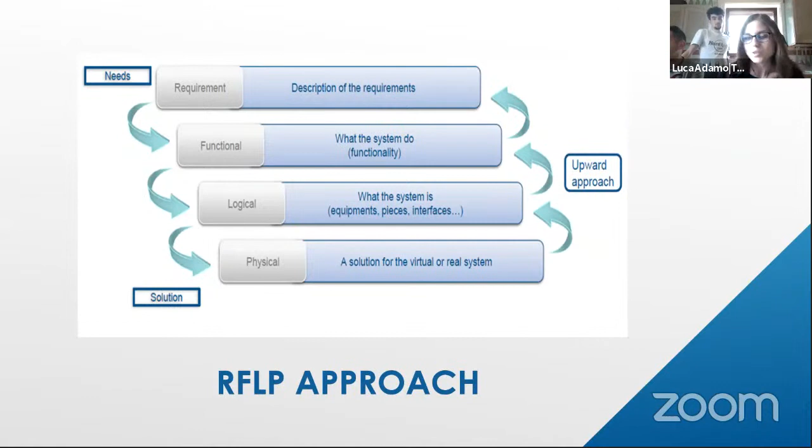We used and adopted an RFLP approach. So starting from customer need and functional requirement, we arrived at a physical prototype, or maybe in this case, a virtual prototype. We listed the customer needs and underlined the keywords to understand better our task, in order to satisfy what our customer needs.

The first phase was brainstorming, and we used the flower technique that we learned during a creativity session on the first day of this event. In this way, we could understand better our task, and we used more and more sketches in order to evaluate our idea.

The preliminary analysis was the comparison among different concepts and shapes. Among different shapes and structures, we decided on the simple parallelepiped compared to an inflatable shelter, sphere, or extendable cube, because it is at the same time able to withstand large loads - not only nuclear, but also thermal and mechanical - and it is particularly feasible and cost effective.

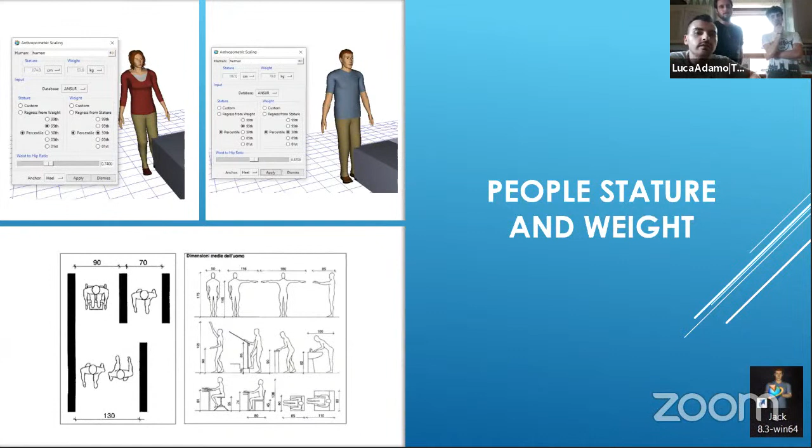The first thing that we did to understand the measures of our prototype was to understand the standard dimensions of people. In particular, we looked for an average man and an average woman, and we used these dimensions to generate our first prototype.

We used the software Jack - this is why Jack in the Box - to understand if these dimensions were able to have 3 people inside the capsule during these 3 days. We found the perfect dimensions, so we arrived at our final prototype, where you can see the dimensions written in the lower part of the slide.

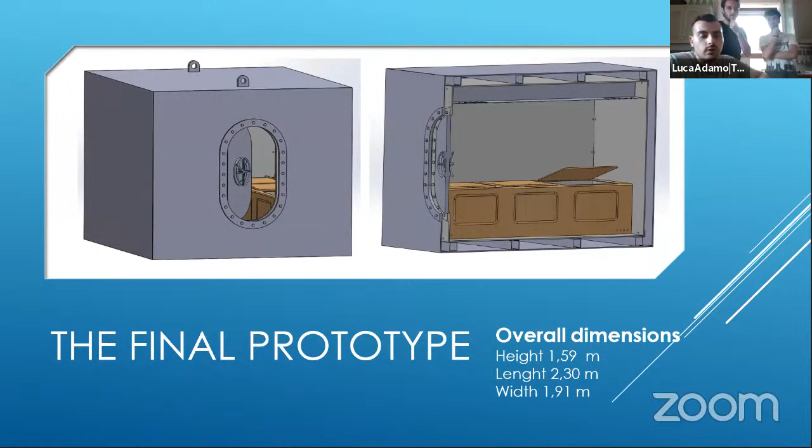Moving on, we looked for something that was easy to transport and easy to assemble. We wanted our prototype to be constructed using only simple parts that had to be connected with bolts and nuts. So it is feasible, and also using simple parts, it is cost effective - all the parts have a low price.

Then we can move to the living cell, the part where people have to stay during these days. The living cell is made of fiberglass to make it lightweight, wood for the places where people can sit, and aluminum for the ventilation system.

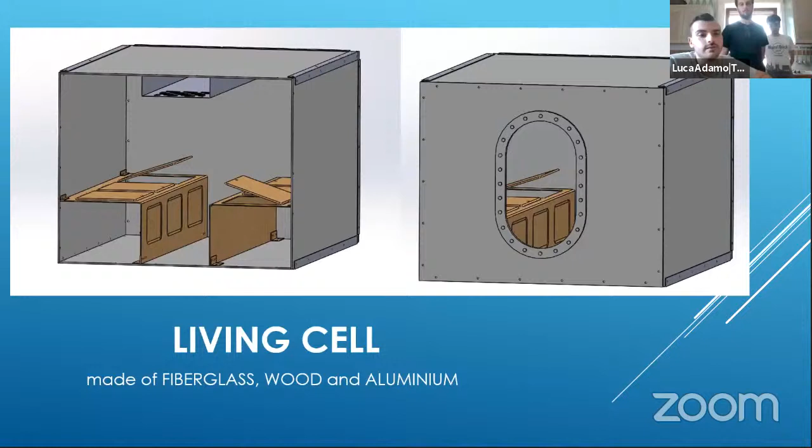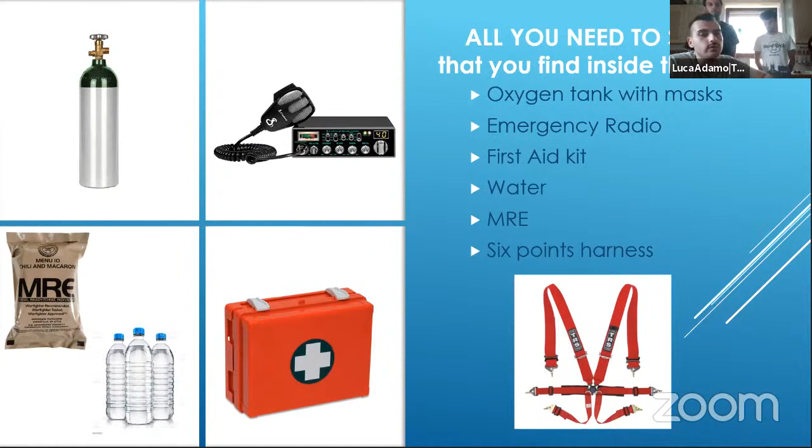We designed 2 lateral seats with storage compartments to optimize the space. These compartments had to contain everything useful to survive - for example, an oxygen tank with masks, an emergency radio, a first aid kit, water, MREs, and we also thought of introducing a 6-point harness to prevent injuries to the people inside the box.

One of the most important parts of the living cell is the ventilation system. All the components useful for a ventilation system are in an aluminum box positioned on top of the unit. Inside the box, we have the standard components of a ventilation system, but with a main component that makes a normal ventilation system able to work also in an absolutely closed cell. The main component is the filter, made of potassium dioxide, that is able to convert carbon dioxide into oxygen.

In order to protect the cell, which we have seen is made of easily breakable materials, we add an outer shell. The outer shell is made of structural steel and is reinforced by rectangular beams. The fact that it is made of 2 different structures makes us able to have a space between the inside and the outside of the cell.

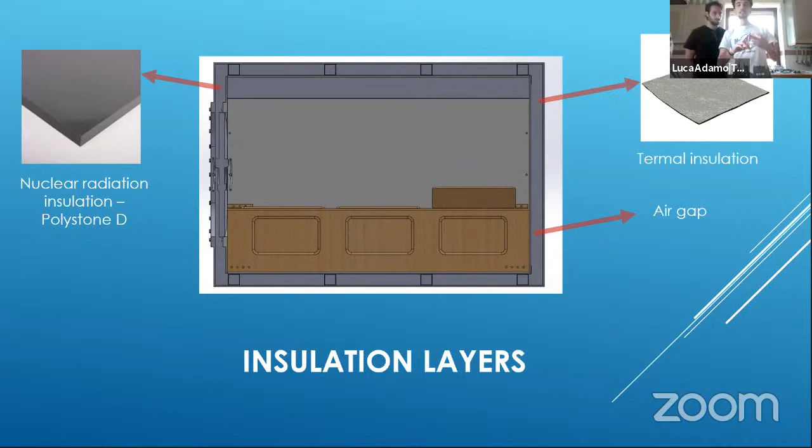We use this space with air, which we know is a very good insulator. But we also add two layers: a thermal insulation made of technofiber, useful for thermal insulation, and a layer made of polystone D that is able to protect the cell from nuclear radiation. We also add two supports to make a helicopter or crane able to rescue the cell in a difficult situation.

Then we analyzed our structure using FEM analysis. To carry out our analysis, we used a simplified model of the structure made of only 1/4 of the structure, for computational time and simplicity of the analysis.

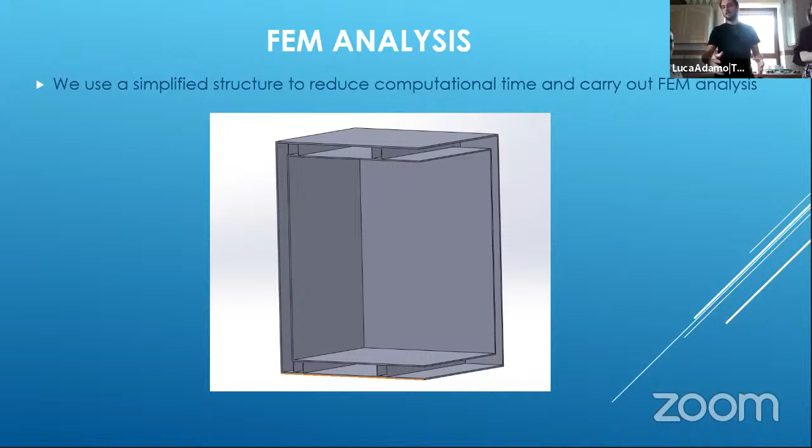The first thing that we analyzed was what would happen after an earthquake when all the debris are on top of our structure. So we put a vertical load on the roof, and we verified that the stress in the structure was very low.

We tried to apply bigger loads, and then we discovered that our structure was robust enough.

Then we tested what would happen if our structure was 5 meters deep underwater after a tsunami, applying pressure on all the other walls. We discovered that in this condition we were safe, because steel has a yielding tension of 300 megapascals, and in our case we have only 261.

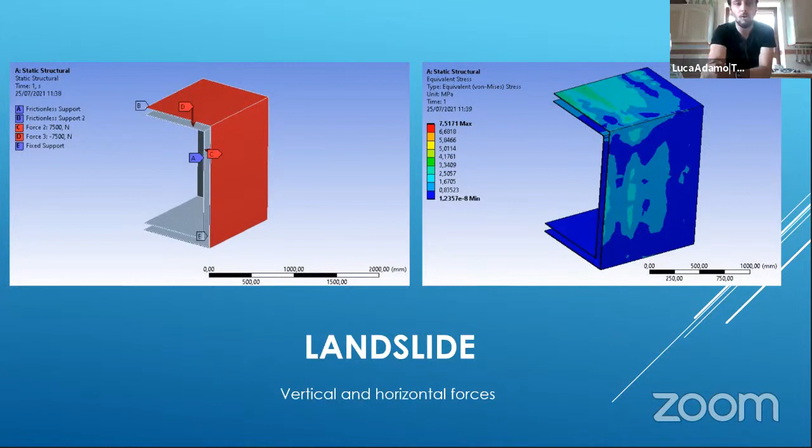Then we tested a landslide, applying forces on the vertical and horizontal walls, and we saw once more that we had only 7 megapascals on the walls.

So thank you for your attention. That was our project. Good luck to everyone that follows us. If you have any questions, we are here to answer you.

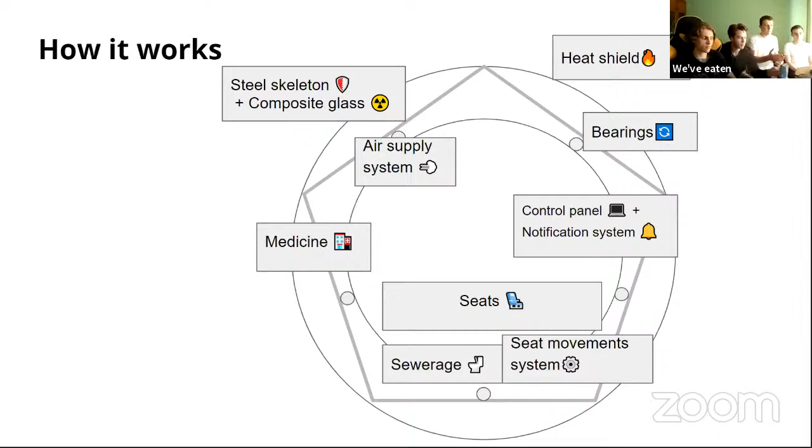Okay, let's talk about radiation. As we know, the best radiation protection from gamma rays is lead, a heavy layer of lead. But I found that the composite glass, which consists mostly of barium oxide, can protect better than anything, and it protects from gamma rays very well.

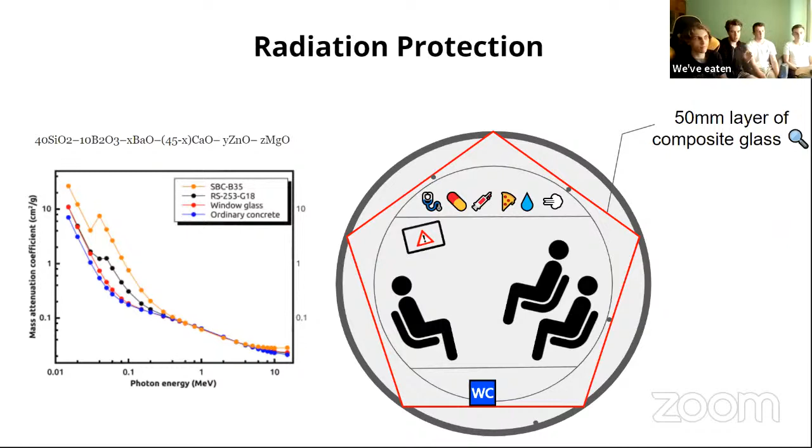Okay nice, what about fire protection? We found out that the best thing to protect from high heat and high temperatures is to cover the capsule with a heat shield, like the ones space shuttles use, and it works pretty well.

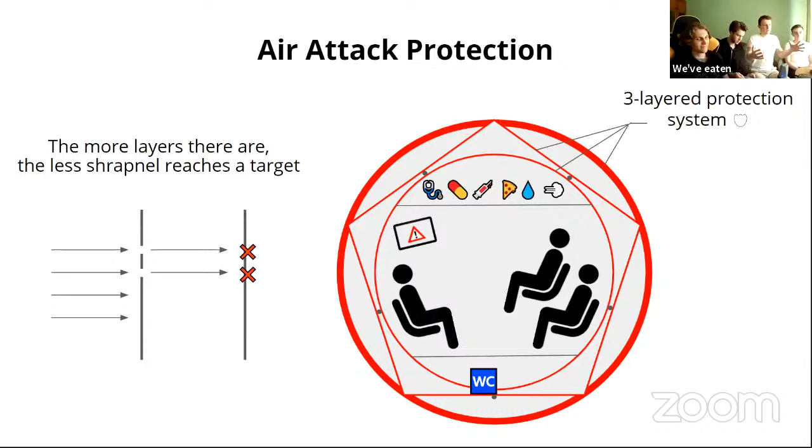Talking about air attack protection, our strategy was to create as many layers as we can, because each layer will slow down the shrapnel. So you can see that our system consists of 3 sub layers.

Also, our capsule from the inside is equipped with everything a person needs for comfortable life during 3 days. It has comfortable seats with a seat control system, so passengers can control the position of the seats. We also created a sanitation system that keeps the passengers clean, and an auto-opening safe so the user can open the fridge or get medicines with no effort. Our task was also to create something from eco-friendly materials.

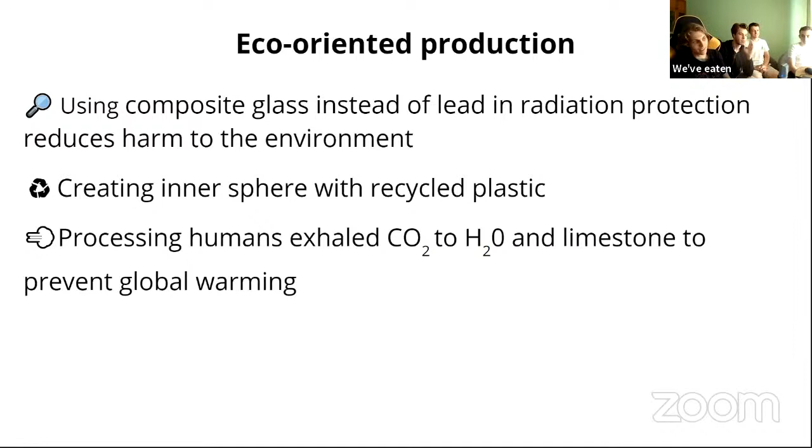Our first option is to use composite glass instead of lead, as Jurek said, and that really matters. The second is creating an inner sphere with recycled plastic because it's cheap and strong enough. Last but not least, we have an air supply system that converts exhaled carbon dioxide to water and limestone, which helps prevent global warming and also increases comfort.

Last but not least, it's about cost. Our capsule, made of recycled materials, can be repaired and delivered by train, the cheapest way of transport. Each capsule doesn't have an expiration date. As you can see, one capsule protects you from totally everything — it's totally armored, and all the electronics can be made by yourself, so it's very easy.

Our plan is to introduce this all over the globe. Our capsules, not like in the picture, can be disassembled and reassembled where they are needed, by disassembling the steel construction and putting together the rubber parts. That matters, and it means it can be delivered wherever it is needed.

Thanks for your attention, but we also want to explain a bit more how it works. Imagine a joint where there is a sphere inside and another sphere with a steel carcass on top, and it moves freely inside on the bearings. That's all, thank you — do you have any questions?

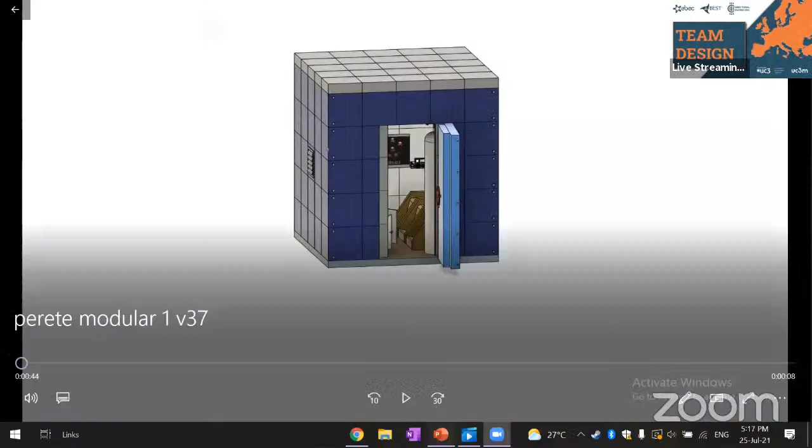Hello, everyone. My name is Cristina Sandu, and we are team Engineers. My teammates are Vlad, Christian, and Theodor.

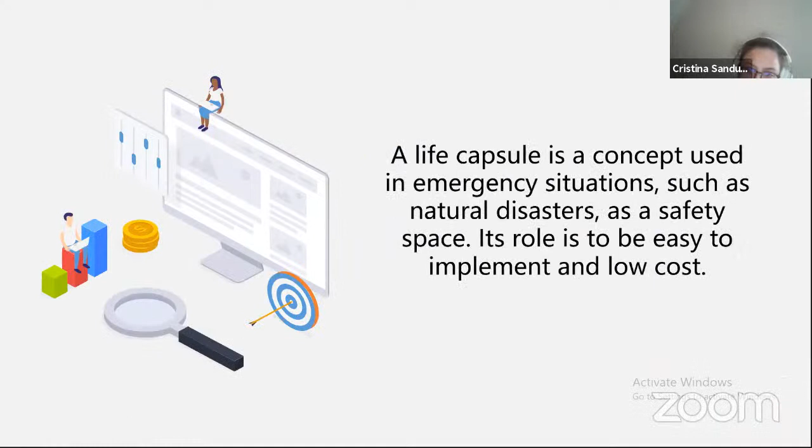The task brought forward today was to create a life capsule in order to save lives, and this is how our project, the Protect, was born. Our presentation will cover subjects such as introduction, talking about our concept, our design, and the final cost and implementation worldwide. Introduction: a life capsule is a device designed to save lives.

A study conducted in 2020 showed that many people died last year, and over 980 events happened. Now, Christian.

Hello, everyone. My name is Christian. About our concept, our concept is based on... We're not hearing you. What's about now?

Well, about our concept, our concept is based on the modular construction of an enclosure designed to withstand a multitude of catastrophes in accordance with international standards. The dimensions of the capsule for life were designed so that it could accommodate a family of 3 people for a longer period of 3 days in optimal living conditions, but the average size of a room worldwide was also taken into account in order to make it possible to install everywhere.

The problems to be covered are represented by the need to implement such a system regardless of geographical area, reducing cost, maintaining an eco-friendly attitude towards the materials used, implementing a universal protection system regardless of natural disaster, and how to implement the solution.

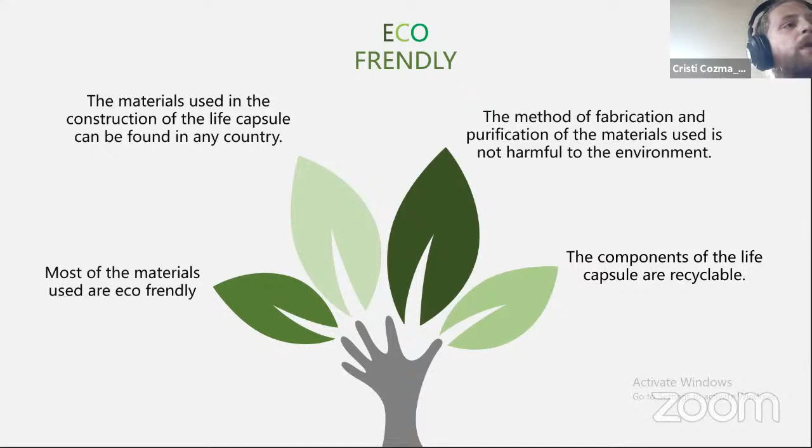Eco-friendly materials such as sand and graphite, used as radiation shielding alongside a reflective paint, can be found in nature. Their processing is considerably less harmful to the environment. Remains after fires can be used for the production of graphite, recycling high carbon materials. Recycled aluminum is made into an alloy with titanium and chromium, achieving a melting point of 1217.5 degrees Celsius. For reference, an average forest or house fire burns at around 600 to 800 degrees.

Vegetable textile fibers were also used as part of the proposed system. Starlite was used for thermal insulation, which has starch as its main component. Aerogel can also be used for a higher price, and it's easier to infuse into the inner material coating of the wall.

Comfort elements are provided by chairs with an optimal position for sleeping, the backrest being inclined between 100 and 115 degrees, with adjustable side headrests. The seats are also equipped with a height-adjustable body harness. The shelter is equipped with a toilet and an additional bench that also serves as storage space. Physical and mental needs are covered.

The life capsule has a radio station for environmental measurement, communication stations, GPS, and an AirTag with e-ink technology for display, clock, calendar, and ambient light from LED lamps powered by nickel metal hydride batteries, providing continuous lighting for at least 4 days per light.

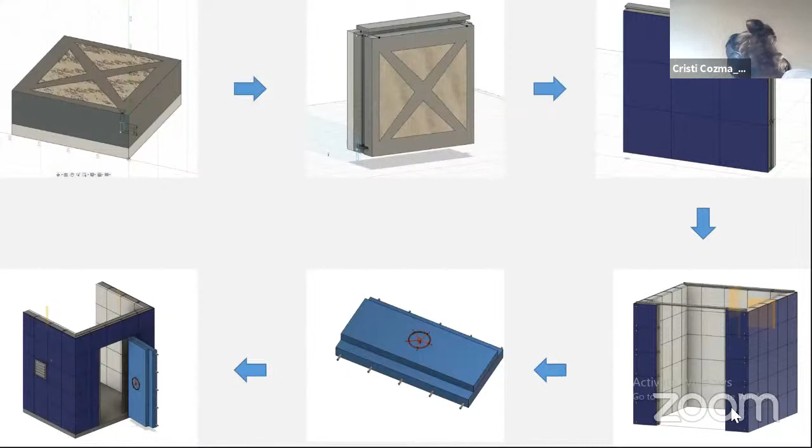I'm sorry, but we're still not hearing anything at the moment. Can you hear me now? Yes, now we do. I'm sorry, I don't know what's going on today.

Our design was based on the everlasting concept of modularity. All tiles are constructed in such a way that they can be easily put together and, of course, aligned properly without the need of any special supports.

After installation, the tiles can be bolted together, reinforced with cross beams, and sealed on all edges with various types of gaskets. The X-frame seen on each tile was inspired by structures used in skyscrapers, with the thought that it would help with jerking motion as seen in earthquakes.

The outer shell frame and compacted ballast, made out of sand and graphite, provide radiation protection better than lead because of lead's poisoning properties. Insulating materials made from Starlite or the more expensive aerogel are sandwiched together to achieve high resistance to elements like fires, floods, and powerful winds, and possibly even airstrikes that land nearby the life pod, due to its high density.

With these tiles, the life pod can be built in any desired size, but for the purposes of this presentation, we have adapted it to the average size of a room found in households all over the world.

The two-way radio and GPS unit have been bolted onto the walls for immediate access in case of any disaster, providing immediate communication. We chose to use an AirTag-like device that can hold its charge for days while communicating each user's location, and a low-power radio that can transmit information from the authorities.

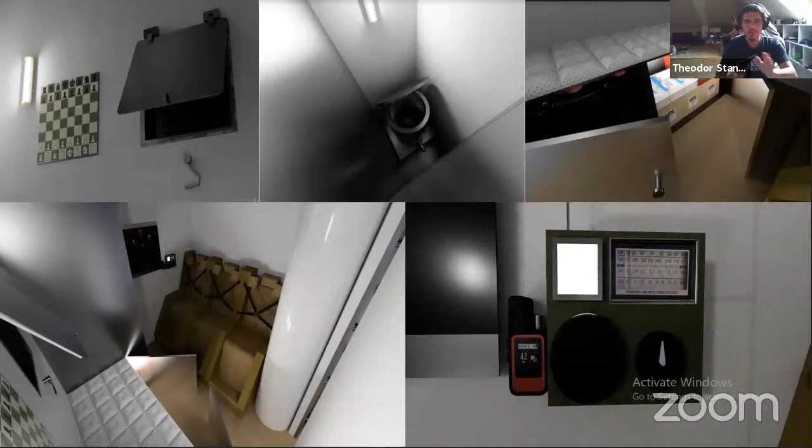Last but not least, to maintain structural rigidity, the door was also developed to withstand any form of abuse, whether natural or man-made. The shape we chose was determined to have the best properties against radiation and water leakage due to its shape and the displacement of its surface area.

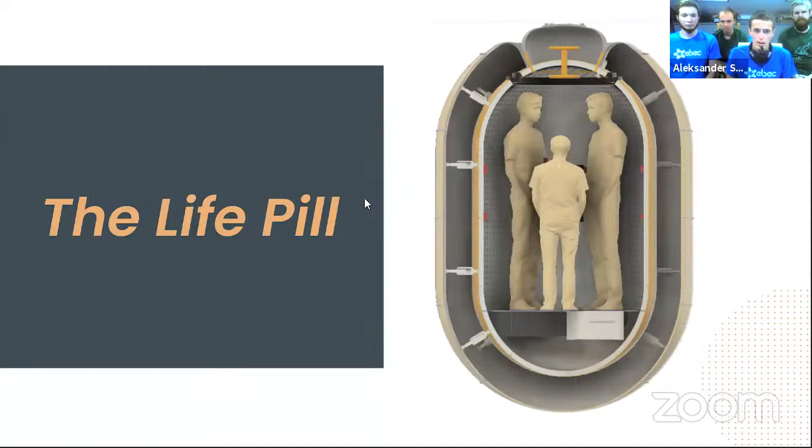We can't hear you. Sorry, yeah, we can't hear you, sorry. Can you hear me now? Okay, I can see that you can. Okay, let me go back.

This is our solution, the life pill. It is constructed like this. This is a structure made of two shells, an outer shell and an inner shell. In between, there's a water jacket. There's storage on the bottom and an entrance on the top. It can be on the side depending on how it is placed in a home.

The outer shell is made from 6mm rolled strip steel. It is coated on the inside and outside using zinc to prevent oxidation, and there's a fire-resistant cork on the outside to give some insulation. It is bolted from segments, 14 segments in total.

The inner shell is also pill-shaped. It is made from 4mm aluminum alloy. There is insulation on the inside, and there are also accessory points noted with these dots. It's also segmented and bolted together, with only 5 fragments.

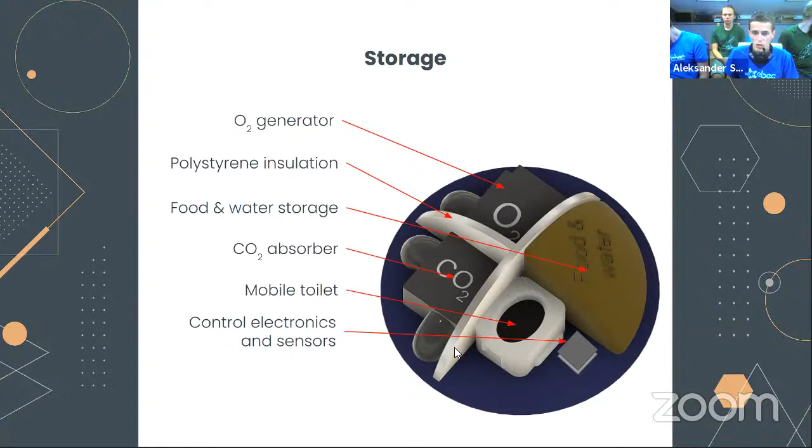The storage system at the bottom houses the oxygen generator. There's insulation between all the systems because the oxygen generator and the carbon dioxide absorber generate heat. There's also water and food storage, a mobile toilet similar to one in a camper van, and a place for control electronics and sensors.

Let's look at the cross section. Here we have 45mm insulation of styrofoam, then there's the aluminum, then there are shock absorbers in the water jacket that make sure the shells are placed correctly, and the absorbers are placed on ball joints. And there's the steel and cork on the outside.

The entrance is built like this, so we have an openable outer cover. If you need to, in an emergency, open this from the outside. This cavity here is filled with water using this valve, and the water comes from the sides.

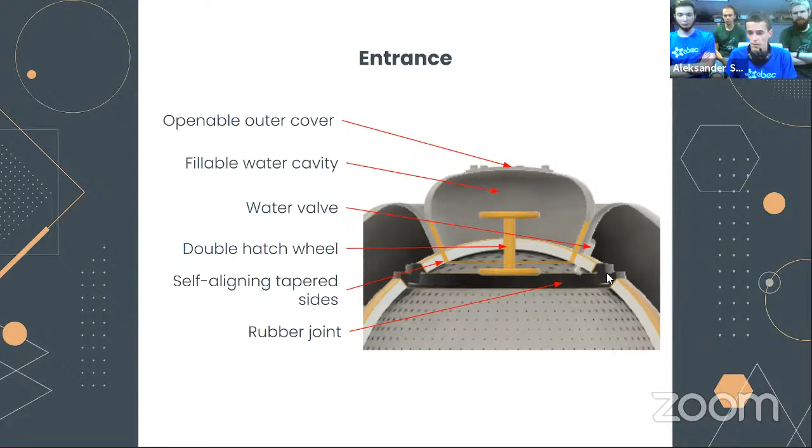So the water can also be routed here. The sides are self-aligning; they are tapered, so it's easy to close. And there's this rubber joint because this inner surface and outer surface are connected here. So this is like an additional place where it can bend.

Now for the sensors, there are of course LED lights, some GPS receivers, GSM radio transmitters, and antennas routed to the outside of the shell. There are sensors for oxygen and carbon dioxide, and there are smart bands to monitor life functions of the people inside, and a Geiger counter.

For the food storage, there is a lot of conservable food, high energy food, some drinking water, but also a first aid kit, maybe Lugol's iodine liquid.

There are mountable accessories. There are safety belts for the impact, nylon string ladders if it's placed vertically, and hammocks so you can always keep the hammock parallel to the ground. So even if it's slanted, you can sleep on a nice parallel surface. The toilet can also be mounted, and there are soft foam helmets for the impact, some blankets for sleeping, and an entertainment system.

Now for each of the dangers, we wrote what is this connected with and what kind of damage we can expect. With fire, we have the cork insulation, which should for some time provide insulation and should not ignite. Then we have the water jacket, which has very high heat capacity. So for example, an 8-hour fire, which is a normal house fire, this should not go above 40 degrees.

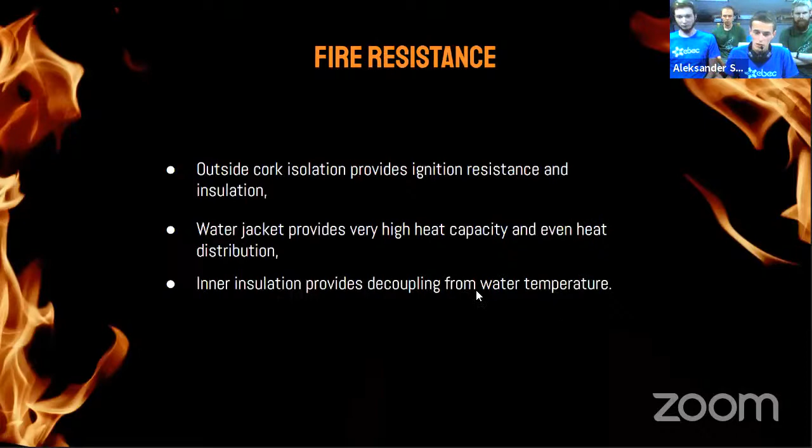And the inner insulation decouples from the water, so even if the water gets hot, on the inside it's colder.

For earthquakes, the ductile outer shell prevents fracture. It's made from moldable steel. Then we have shock absorbers and the water jacket, which can negate the impact and make sure the forces are even across the whole structure. And the GPS systems can help rescue forces.

And for the tsunami, we have positive buoyancy, and it's fully sealed, so even if it's in water for some time, there is no water ingress.

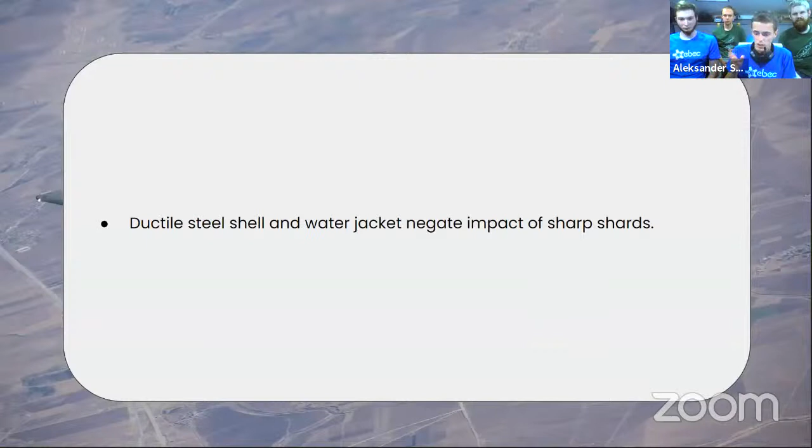When it comes to landslides, the whole structure should provide collision protection, so that with crashing force, people inside shouldn't be harmed. And when it comes to airstrikes, the ductile steel shell and the water jacket should negate any impact of sharp shards generated during explosions.

And for radiation, the big water jacket is what we use, and also we have metal plates, which should significantly reduce any radiation.

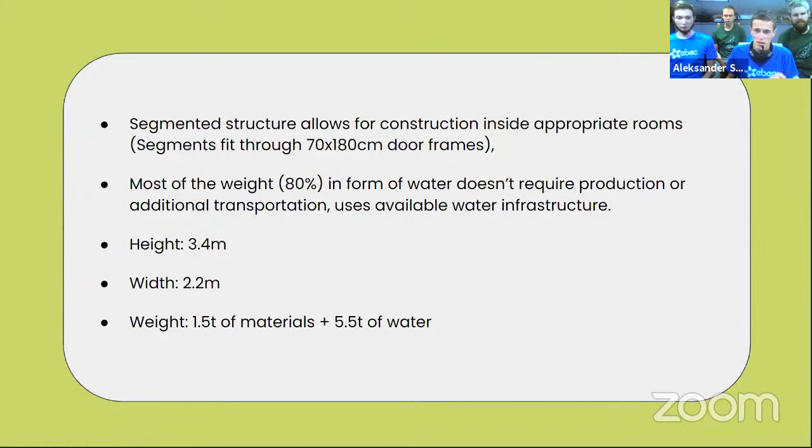When it comes to challenges we faced, there's transport. All the segments are at maximum 70 by 180 centimeters, so they should fit in a door frame if you want to build it into a house. And most of the weight is in the form of water, so it doesn't require production or moving, and it is available locally. It is very cheap too.

When it comes to air management, we have two technologies: CO2 absorption using sodium hydroxide, and oxygen chemical generators, just like in planes or submarines. Both of these technologies don't need any electrical energy, so even with an electrical fault, they should still work.

For availability of materials, we don't use any uncommon materials. We only have steel, aluminum, water, maybe cork, some styrofoam. They are also quite eco-friendly, and most of this can be produced locally.

And for salvageability, we have GPS and radio communication, just like we said, and it can be painted fluorescently so it can be easily found in debris. Here are the links for the photos, and thank you.

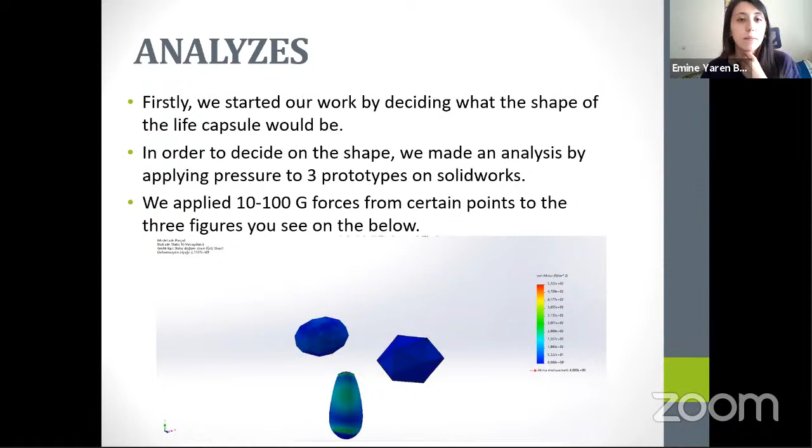Why did we apply the pressure test? Because the life capsule, designed for moments of tsunami, earthquake, and landslide, may remain under the rubble. In this case, the important thing is that the capsule maintains its shape and doesn't transmit damage to the inside. In this way, it can protect the lives of the people inside.

Next, layers. Is the pressure test sufficient for protection? No. So the outer covering needs to be robust in every situation. You can see the layers of the design in the next picture.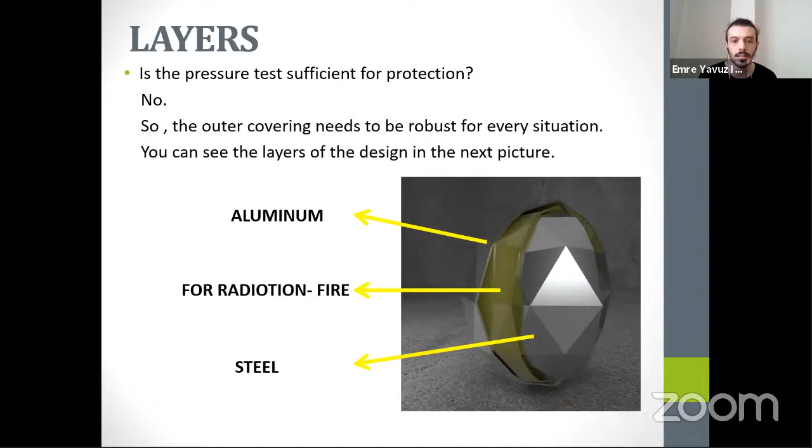First layer, aluminum. Second, for radiation and fire. Third, steel. Now let's explain the layers. The purpose of using two different metals, aluminum and steel, is to reduce the impact of the crash by hitting the aluminum first, then protecting its form by encountering the stronger steel. The durability of the design is important for tsunami, landslide, earthquake, and air attacks.

Nuclear radiation is another issue we need to be protected from. We offer a solution for this problem. Normally, the first solution that comes to mind is plating with lead for protection from radiation. However, as a result of our research, we discovered a newly produced thermoplastic material. Turing Kimya is a Turkish company that produced the world's first lead-free radiation protection shield using boron minerals, called Anti-Rad. This material is 1/8 lighter than lead and does not reflect radiation back like lead, but absorbs it. It is also less costly and environmentally friendly.

Fire hazard: one of the layers that the outer covering will be covered with is for fire hazard. We decided to use glass wool in one of the coatings for the fire problem. What is glass wool? It is a heat insulation material that at the same time provides fire safety. Glass wool has temperature resistance in the range of -50 to +250 degrees, and glass wool products without binder can reach up to 500 degrees.

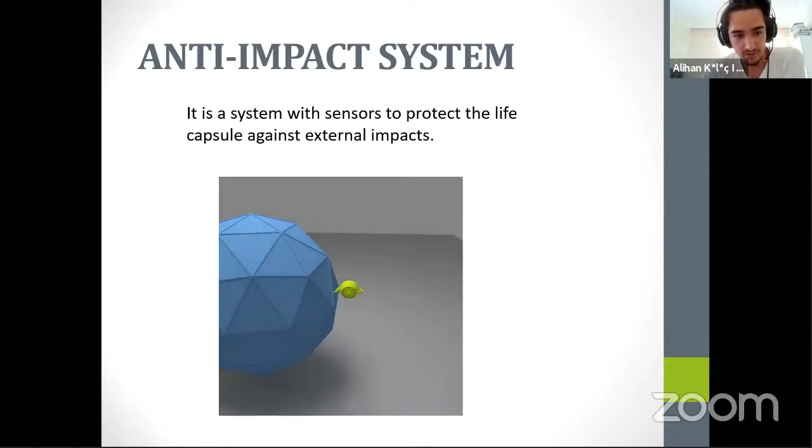The anti-impact system is a system with sensors to protect the life capsule against external impacts. It's very common for this capsule to encounter extraordinary situations, one of them being rolling as a result of the collapse of the place where it's located. You can see the inner and outer parts of the design.

In this regard, we have brought a solution to the design. The life capsule will be two-layered, and its interior will be a complete sphere. Between the two layers, there will be balls placed on three different axes. In this way, just like a bearing—do you know bearing?—the inner part will not move while the outer part moves, following the working principle of a bearing. This provides balancing and stabilizing.

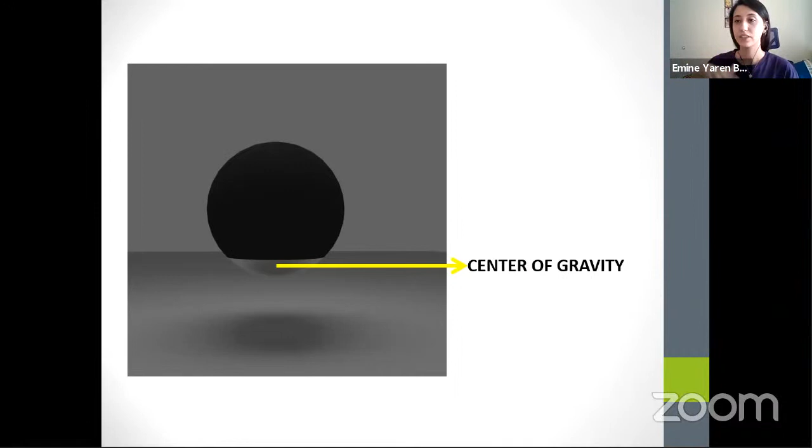This is the center of gravity under the sphere, under the room. Now, the internal structure of the life capsule: what is included inside? You can see a room with 2 beds, because people may need to stay at least 3 days, maybe more. There are 2 doors, since one door might be blocked by rock or rubble.

So there are 2 doors, a toilet, and provisions. The provisions include some preserved foods, maybe some water and first aid kits, clothes, and a communication system. The communication system includes an SOS button.

We'll explain the next spaces. Under the room, under the floor, there are oxygen tubes and tanks, waste water tanks, and pure water tanks—we don't want to mix these tanks. There are also some batteries, because people may stay at least 3 days, maybe more, and we sometimes need energy for electronic devices to communicate with the outside. There's also a diesel motor and engine to support the battery system.

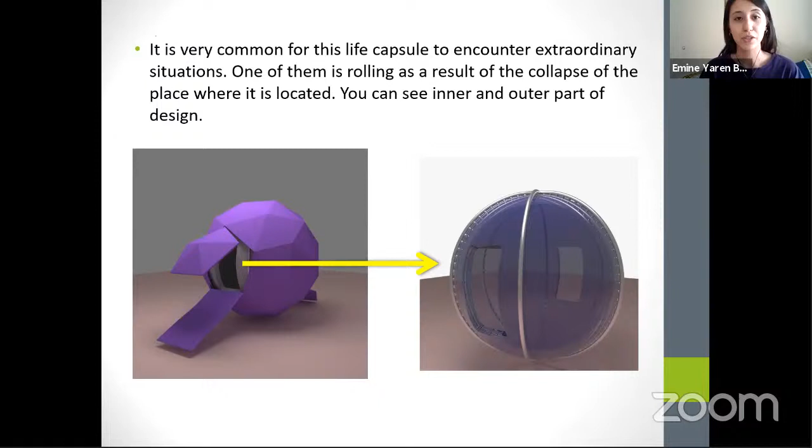I want to add something - you can see the principle of the working in this video. It's the way for disabled people to use it. Maybe we will share it. Thank you very much for the consideration.

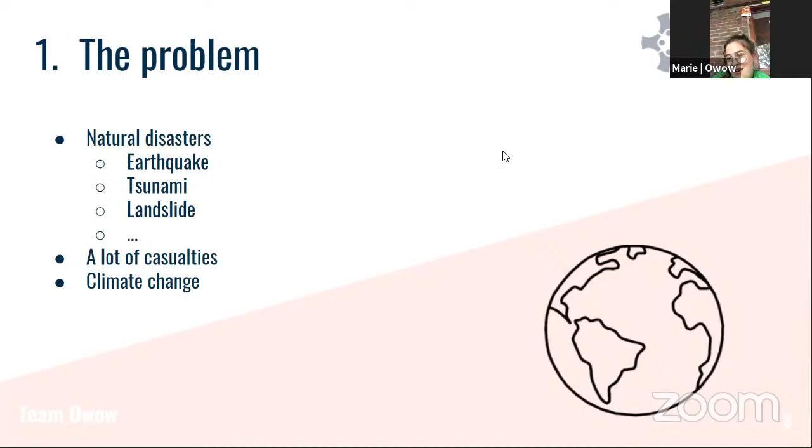Due to climate change, natural disasters like tsunamis and earthquakes could become deadly situations. A lot of people die in natural disasters. Casualties could be avoided by providing good protection. Our design will keep families together. Almost every house has a table for dinner. The table is also central in the house, so it's always close by.

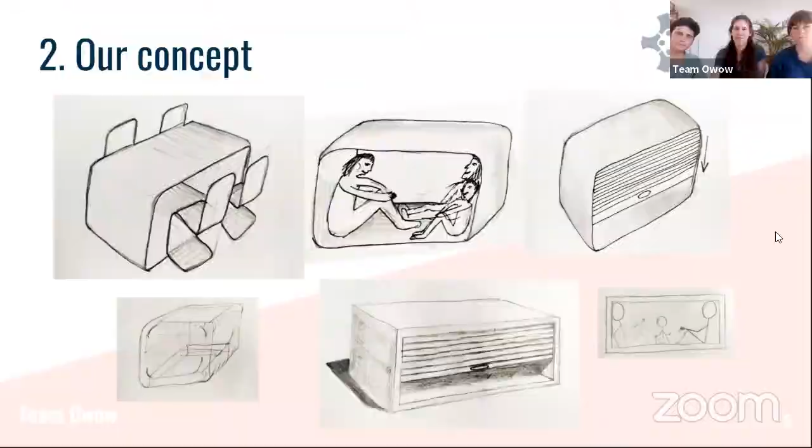It is a place that you remember, having nice family moments. One of the many things you're taught as a child is to hide beneath a table during an earthquake. We want to build upon this first instinct to make the table the central piece of furniture, as a safe haven. This design will protect your precious family against collapsing buildings, fires, and floods. When a disaster happens, we rush to the table and jump underneath. There's enough room for 3 people, even humans up to 2 meters tall.

When everyone is inside, you close the roller shutters, which will make the box waterproof. Next, you pull the cord to inflate the pillows, and they will pop out like airbags. Some seatbelts are attached to these pillows in case of heavy movement, so people won't slam into each other. The pillows also help make it more comfortable, and together with some small windows, they keep you safe. As you can see, the middle of the table is supported, so you won't simply collapse onto the load.

To ensure good air, we installed an oxygen tank and CO2 scrubbers based on soda lime to remove carbon dioxide, because you never know when you might be stuck in the water or beneath a ton of rubble. Naturally, a small medkit is present with some iodine tablets against radiation, and although food and water isn't needed for 3 days, we have the space, so we just included it.

The table is also equipped with a torch you can charge with a hand crank and a small radio station to communicate with the outside. On the outside is also a capsule you can activate with human scent, so search and rescue dogs can find you.

For the materials we used for the top table, bamboo. Bamboo is the new steel, they say it's like a really future wood. It's very ecological because it's one of the fastest growing plants, and also it converts more CO2 into oxygen than other trees. It's also very strong, stronger than other woods, and like I said, it's like the new steel. It's also used in buildings.

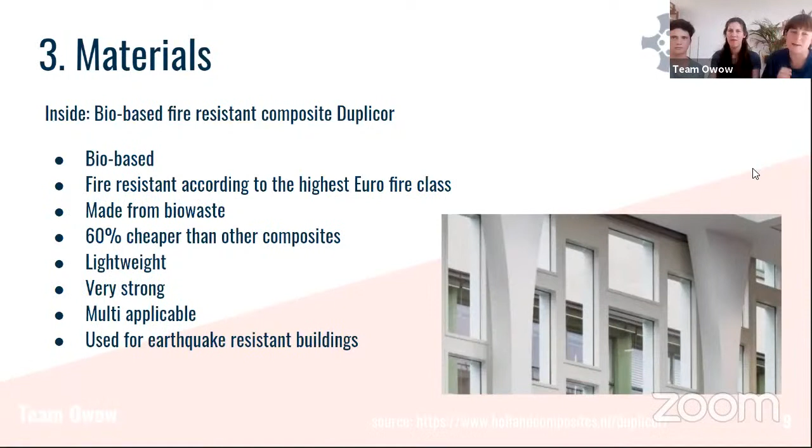Also very strong. It is used in buildings that are earthquake resistant. So it's a very strong material, and it has a high impact strength, and it is easy to

form into a table. For the little windows, we have some little windows on the outside of the table for keeping contact with the outside situation.

For the windows, we use polycarbonate. It is durable, and you can see through this plastic. It has a high impact resistance, so it's also very strong, and it can handle extreme temperatures, what makes it very good for this design.

Our design is customizable, so it can fit in every house. It's available in different colors and is adaptable for bigger families. The tables are easy to assemble, lightweighted and stackable for efficient transport. Because our concept is both table and life capsule, it's cost effective and durable.

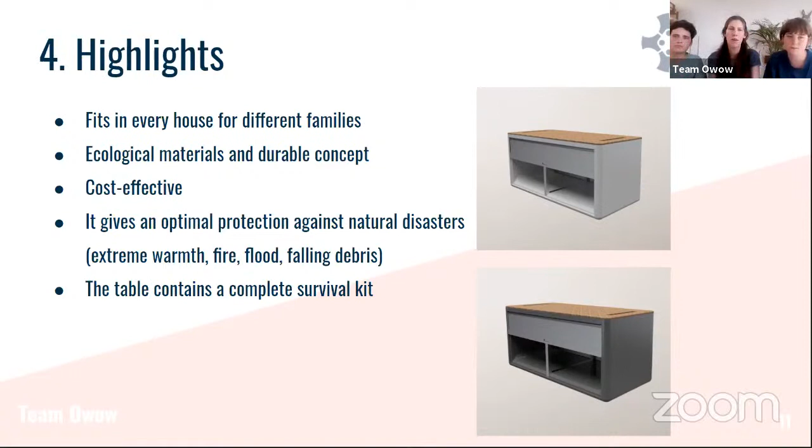As Polly mentioned, the used materials are ecologic. The table can protect you against extreme warmth due to the materials and a thin layer of air between the materials. And all the materials are fire resistant. The box is also waterproof and very strong, so it can protect you against flood or falling debris. This was our presentation. Now we will answer your questions. Thank you.

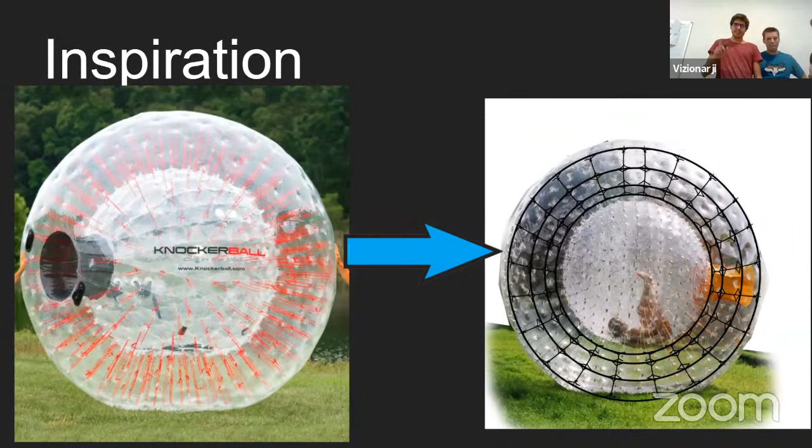We were thinking and asking ourselves, what if a Zorb ball wouldn't only have two layers, but more of them? It would still function as a Zorb ball. And not only that, if we make a Zorb ball with more layers, we can put any local ingredient or local material into those layers to make this ball survive anything.

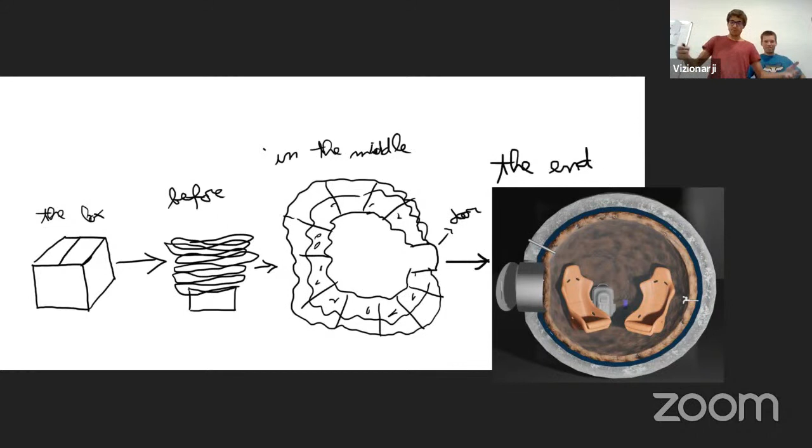So we came up with a plan to ship the Zorb ball to each of our customers. The customer would inflate it, and after inflation, simply put locally sourced materials into the layers.

You can have as many configurations as you want, just designing a different Zorb ball. In our configuration, we would have the outer layer from concrete, an inner layer with water, and then an inner layer with insulation from earth. But this isn't obligatory, of course. You can fill the outer layer with only dirt if you don't have concrete, and the inner layers only with water if you expect to use more of it.

So now I will present you the ecological factor. You may think plastic is not the most ecological, but actually the amount needed for a sphere like that is much lower, it's 20 times lower than the CO2 footprint of an aluminum sphere. So actually PVC is much more ecological than metal.

So, survivability aspects: we've got fire, earthquake, tsunami, landslide, air attack, and nuclear radiation. Let's go over them.

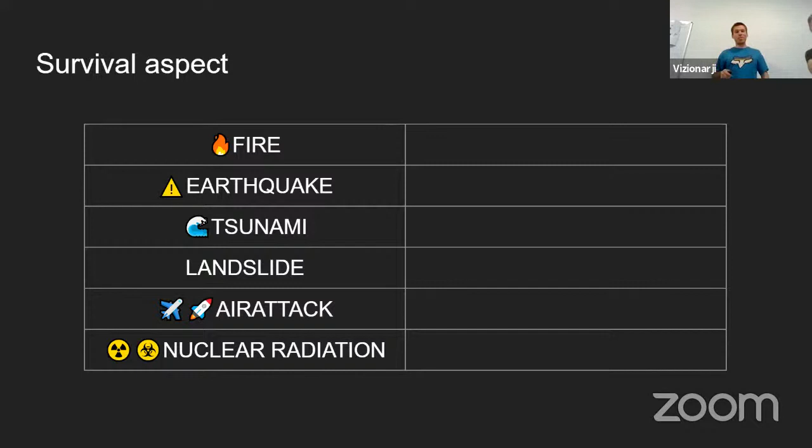For a case of fire, our configuration is designed to withstand it. The problem with fire is that you cook inside, so we have concrete, then water, then insulation. We have a valve to release the water when it starts boiling, and when water goes from liquid to gas, it takes much energy, so it cools you down. Then you have the inner insulation layer.

For a case of landslide or earthquake, you can reinforce the concrete with steel wires, so the ball maintains its shape during rolling and stuff.

Then we have a tsunami. For that case, we calculated the buoyancy force of our sphere, so it floats. You may think it may not because it's concrete, but actually it's large enough, it floats.

And for the case of an air attack, our sphere is shaped like an onion, so it has many layers, and the shrapnel and stuff doesn't penetrate it.

And for nuclear radiation, actually the only thing that stops gamma rays is thick, dense material, and that's concrete in our case. Then we have neutron radiation, which is easily stopped by water, and it's very harmful toward humans, so it's good to stop it.

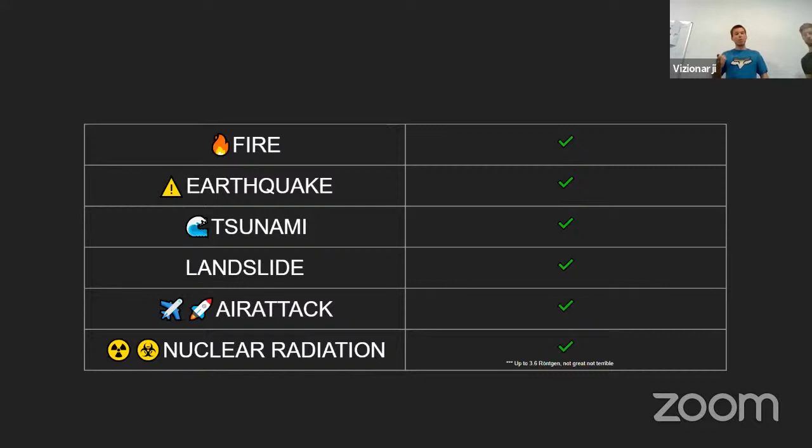So my friend will explain the rest. Standard cabin features include enormous space suitable for more than 4 people. Because of this large space, the air itself is sufficient for 12 hours for 1 person, but it's also equipped with a 10 liter oxygen tank, which is enough for up to 4 days for 4 people. The cabin is cleaned of carbon dioxide with absorbers made of potassium hydroxide.

There are also biodegradable poop bags and a backpack full of food. Additionally, you can have more layers in the Zorb ball, which can be used for different drinks or as a waste tank as well. There is also an enormous water tank located in one of the layers of the balloon. You have a tap for access to the water layer, so this water has more than one purpose.

Then we calculated some costs, and we found out that the biggest cost is the Zorb ball itself, which will be custom made, and we calculate that it will cost around 500 euros. So with all the other parts and materials, the price does not exceed 1,500 euros.

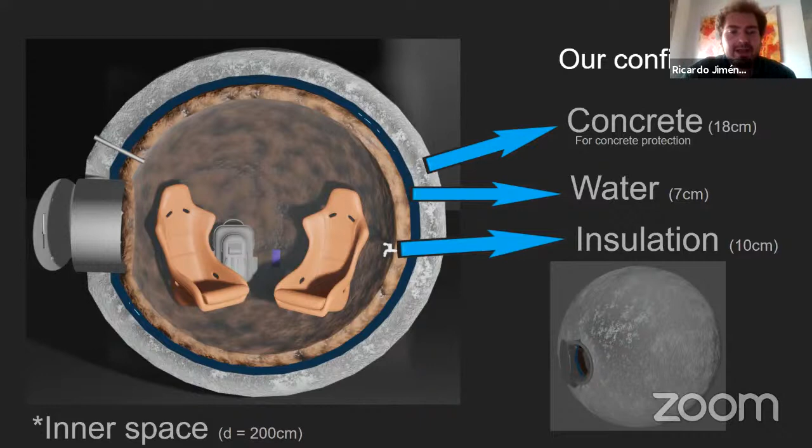I have a question regarding the equipment necessary to survive, to be put inside your solution. If you could go back to some of those slides where you were talking about the CO2 absorbers or the O2 generators, there was... yeah, it was like that. So I guess all of those features really are not inside the ball when stored, because if you can store it folded and inflate it at the place of delivery, how can you deliver all of those as well?

And if any of them need energy, or if you have thought about something that needs energy, how can you generate it? Because I haven't seen anything like batteries or a system to generate electricity in your solution.

Great question. Well, I would like to point out that our priority was to make a design available for as many people in the world as possible. So we wanted to exclude all the complicated equipment, including any electronics, which would mostly make the thing more expensive. So we focused on all of the things that you can simply store in the backpack.

And we maybe didn't point this out too much, but for example, the oxygen tank, you don't really need such a big oxygen tank. It can be brought after the initial build of this device. Also, all the absorbers are not in such high volumes that you'd need to implement separate rooms for them, including their way of working doesn't require any electricity.

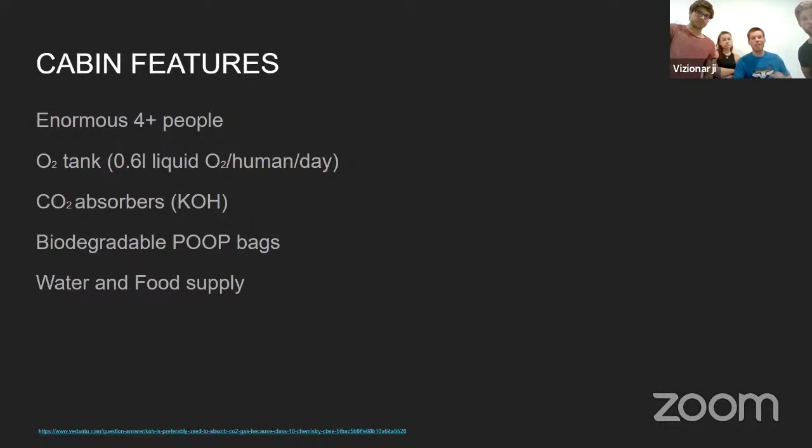Then finally, a question for me. But first of all, thank you for this presentation and for all of your work. You have included a valve from the middle layer through the outer layer to the outside, right? For the stream of the water. You've also included a valve from the middle layer through the inner layer to your living space.

What is your assessment of these two valves that still connect the outside to the inside through that middle layer, on the safety of your solution?

Well, we imagined one-way valves, and obviously having excess of fumes inside the balls, they would let air from the main living area outside. We didn't assume that any of them would fail, leaving pressure inside or letting any of the outside layers bleed into the inside.

So in short, we always assume pressure inside to be bigger than on the outside, and one-way valves to let pressure from the inside direction toward the outside layers.

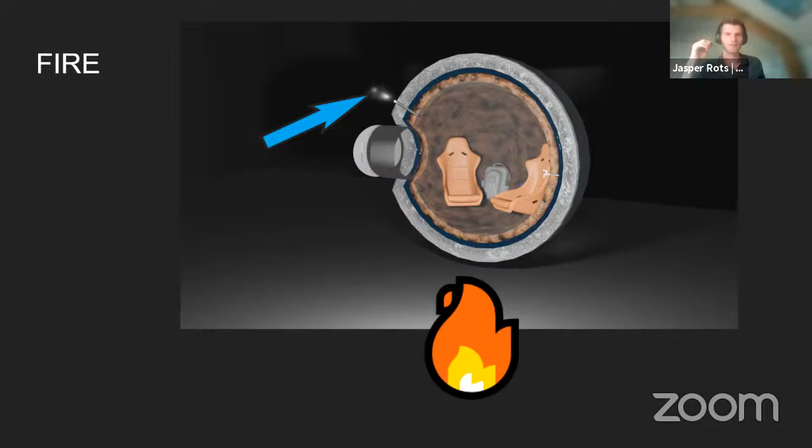Well, we imagine that the shape of a zorb ball would allow us to make this mold. Yes, of course, our PVC would be thicker than just a normal zorb ball.

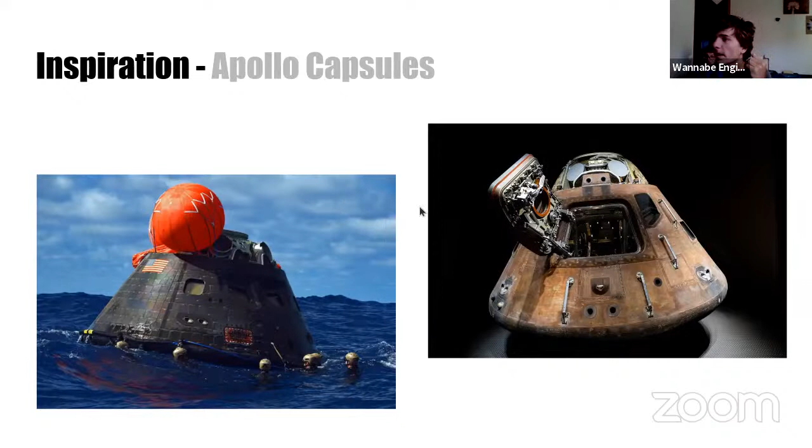So an overview of our structure. What you see is made out of 1 millimeter thick steel. We thought 1 millimeter thick would be a fine balance between not being too heavy but also being stiff and sturdy. We'll show you now a preview of how it unfolds actually.

So this is the design we made in SolidWorks and a short video of it. You'll see more of how this works later. I forgot to mention, this entire thing, tent or capsule, has mesh on top, on the floor and on the roof. The entire thing is surrounded by a skin we designed, like a thick fabric. The way we have sealed it to the structure is that we have made some rails.

If we see closely here, this is the section of the outer floor ring, which you can see here. It has a groove, and that's what our skin connects to. The outer layers are fiberglass, we'll explain why later, and the skin inside we'll also explain later. They connect and fold around a steel cable. This connection, this seal between steel and the skin, is what we believe to be waterproof. I've actually tested it in real life. So yeah, this is how we made it.

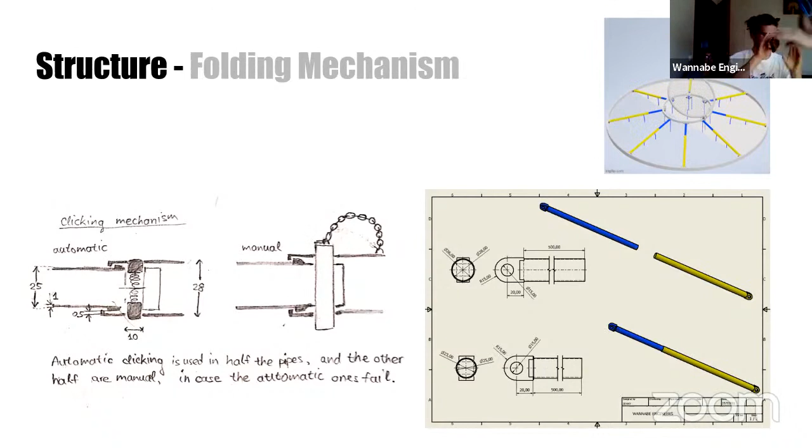Back to Feather. Okay, so here I'm back again. So what about the roof, or where you can also come inside? It's a roof/hatch. You can see the design here more in 3D, and it basically has a hatch with a mesh on top, and there's a rail on the ring, so we can also put the skin there so that it's airtight, waterproof, and has a lot of extra features you'll see later.

This is a scrap sketch we made, and this is how it works. It has some hinges where the pipes that Eugene mentioned connect, and also a hinge outside, which is made so that you can open the hatch.

So we have put high temperature black silicone on the ring of the roof, between the hatch and the floor and the roof ring, because that can resist up to 1,200 degrees Celsius, and which also makes it airtight. The locking mechanisms we didn't get to design, but they are basically these briefcase hatches you can see on the upper right corner, on the inside.

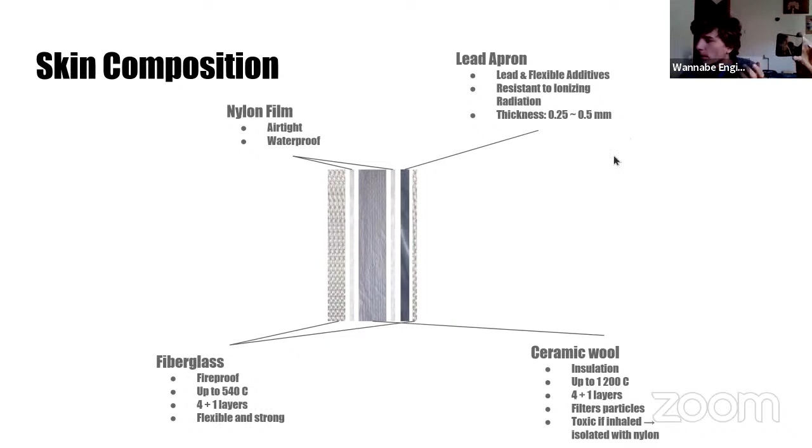It's not 4 plus 1 layers, that's a typo. But anyway, the ceramic wool is toxic for humans, so that's why we have wrapped it in nylon, which also gives us some waterproof and airtight characteristics. And finally, we have also a lead apron, basically the lead composite that they use in suits when you're taking exams with X-rays. We found out that protects you against 90% of the radiation, so that's very good. Supplies are included inside, because you also need to live somehow.

Well, we have got this very portable toilet. As you can see, it folds into this nice suitcase. And we may also include extra poop bags, because you may need them.

Then water. We concluded that we need 12 liters of water for the 2 adults and 1 child for 3 days. And look, if you're starving, if you are in a disaster, this will surely make you survive for more than 3 days. And then we have got 3 kilograms of military biscuits, high energy density, dense biscuits basically.

And we concluded that this was that we needed 3 kilograms of them. Here are some pictures we found.

Then this is optional. This is more expensive, but it may be the only option to survive inside when there's a fire outside of the capsule, so you actually cannot renew the air inside the capsule. So you will obviously need oxygen.

We found out that each human needs 400 liters per day. Through calculations, we found out that to survive for 12 hours on this, you would need this canister, which has a length of 65 centimeters and a diameter of 11 centimeters. Not too big, it fits there.

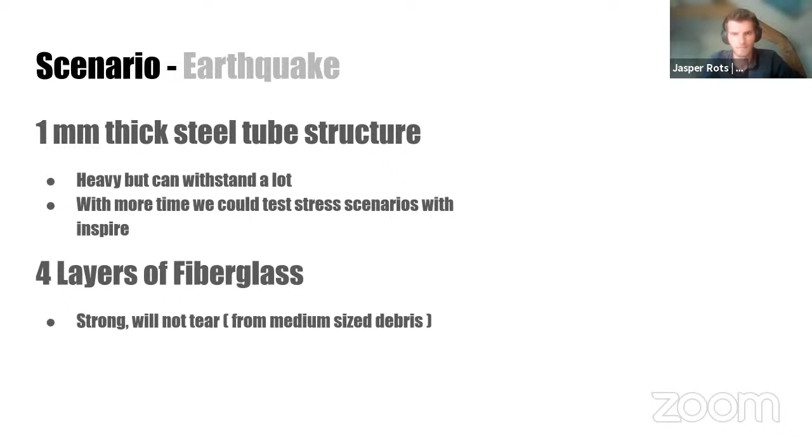Now, other stuff like the toilets and the oxygen tanks, would they also need to go through that hatch? We designed the tent not to fold completely flat, so when it folds up it still has 15 centimeters of height inside. Therein we could store the oxygen tank, the water, all the supplies included. I actually have a picture of that, how we would do that.

This is an upper view from the cabin showing how all the supplies would be stored when it's folded. Those fit inside, and this way everything is tied up with seat belts which persons could use inside. We didn't mention that, and you could also roll it on the side. So yeah, those supplies would come included. It wouldn't be needed for our clients to buy them.

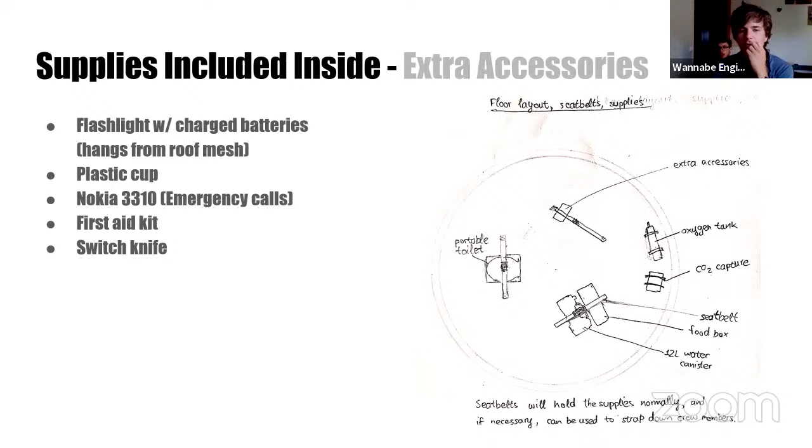Okay, thank you. Any other questions? Not from my side, that's okay. In that case, the topic group would kind of request that you show us slide number 4, if that's not a problem.

Slide number 4, could you elaborate? Yes, overview of the structure. This overview, okay, thank you.

And if you would not mind showing us slide number 21, transportation. It's not a picture of something, but we've written the dimensions of it folded, 42 centimeters. Okay, yeah, the outer height, let's say it's 42 centimeters, and the inside height is about 15 centimeters, what I said earlier. But yeah, do you have any questions on here?

Okay, and just one last question: which one of you is Phaeton? I believe the name is spelled F-A-E-T-O. Yes, me. Do you know what was the last time to edit the task on the schedule? I'm sorry, can you repeat? Do you know the schedule, what was the last time to edit your task? So to edit our presentation? Yeah, well, if you spotted during their presentations, we found we were a bit jealous of the name, so we just changed the title from Life Capsule to Life Tent. That's true, we changed it afterwards, but it's a very minor change.

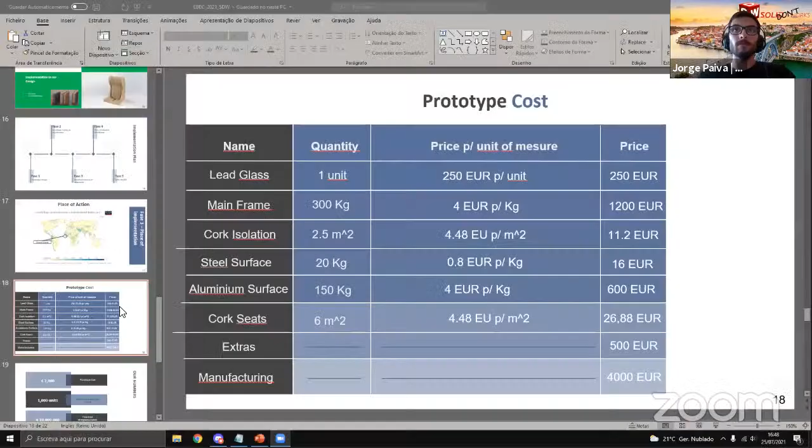Hello everybody, our team is Solid Don't Works, and we're going to present our design for the life capsule. Hopefully we're going to have an approach where we'll express our creative process, our inspirations and objectives, design concept, and CAD execution. We firmly believe that we created a cost-efficient structure that is capable of securing the safety of 2 adults and 1 child for at least 3 days. It is equipped for a lot of possible disasters ranging from fire to nuclear radiation. In this presentation we will talk a little bit about our specific solutions next, and also about our design implementation and our implementation plan.

In our concept we achieved the following: we created a life capsule that ensures, as I said before, the safety of 2 adults and 1 child. As you can see, you have plenty of space for them. We made the seats custom made to a normal adult. It can fit in a normal household. Fun fact, this is our faculty.

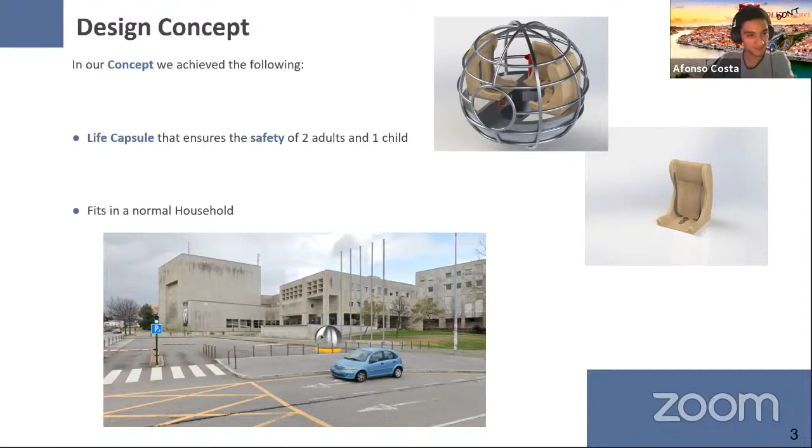Now I'm going to talk more about the structural issues here. We've chosen aluminium for the structure because we are playing with the safety of people, and we chose a sturdy, ball-shaped structure. The aluminium choice was justified because it has good weldability and a relatively low price regarding its strength.

We've compiled some materials which have good and excellent weldability as well as high yield strength, using Granta's EduPack software. We've come up with these solutions and opted for aluminium because it seemed the most cost-efficient one. We've run some simulations on the main frame using the Inspire software. These simulations, made with this lack of time, are not totally accurate, but we can see that we have a sturdy structure able to withstand a big amount of force. So we can firmly say that this is one of the safest shapes we can have to protect the lives of the occupants.

Regarding the walls of the prototype, we chose a 4-layer sandwich structure, and with this, different layers will protect against different hazards. Analyzing from inside to outside, the first layer is a contact surface between the rollers of the main frame, and it's made from steel.

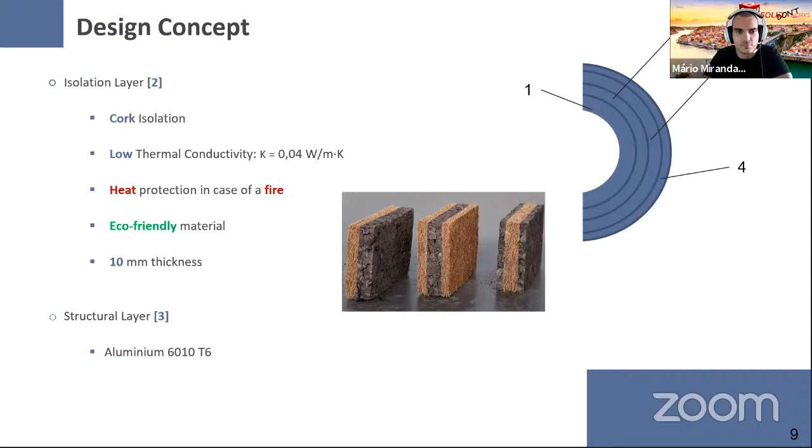Lastly, to cope with radiation, we put an outer layer made of lead to shield from nuclear threats and all kinds of radiation. The glasses are also made of lead or composites of lead.

So the passengers have air to breathe, we chose to install a high-performance air purifier. It has multiple layers with different purification capabilities that offer smoke protection and radiation protection.

Here we highlight two mechanisms of our solution: an inflatable device, and the door hatch. We designed a simple mechanism to close the door, which can be used from the inside or from the outside of the capsule.

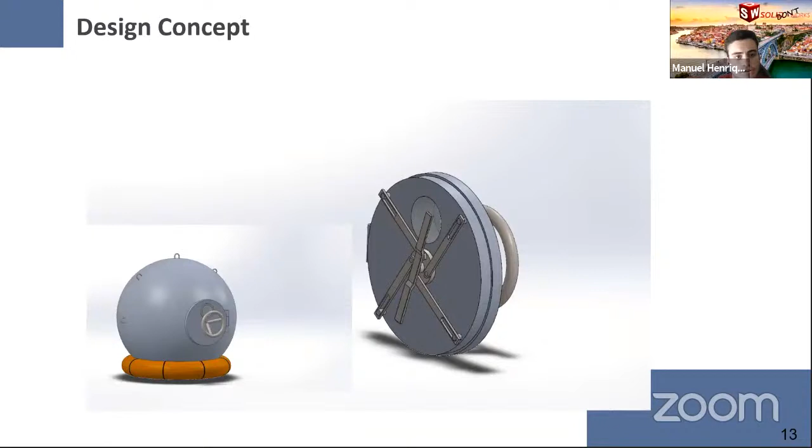Our design concept has a lot of storage. We put a radio, so it's possible to communicate with the outside, a place to drink water, space to store food, some life vests in case of an emergency, and we installed a toilet.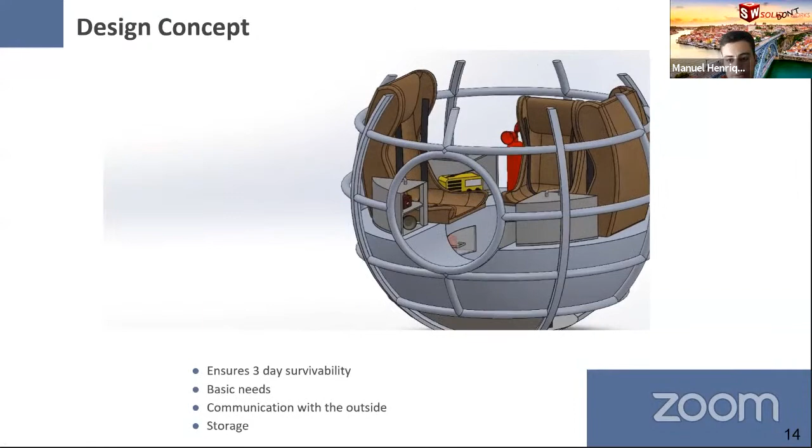Our design has a clean water tank underneath the floor, as well as a dirty water tank. It has two batteries underneath the floor as well, to give energy to an LED light on top. With all of that, our concept ensures 3-day survivability, basic needs for everyone, communication needs outside, and a lot of storage.

Talking more about our sustainability and eco-friendly material options, we chose cork. Why cork? First, we're from Portugal, and we're the world leaders in cork production. Cork is the only tree that can have its bark removed without actually killing the tree, so it's a very good material to use. We implemented it in two ways: in the seats and in the cork isolation layer.

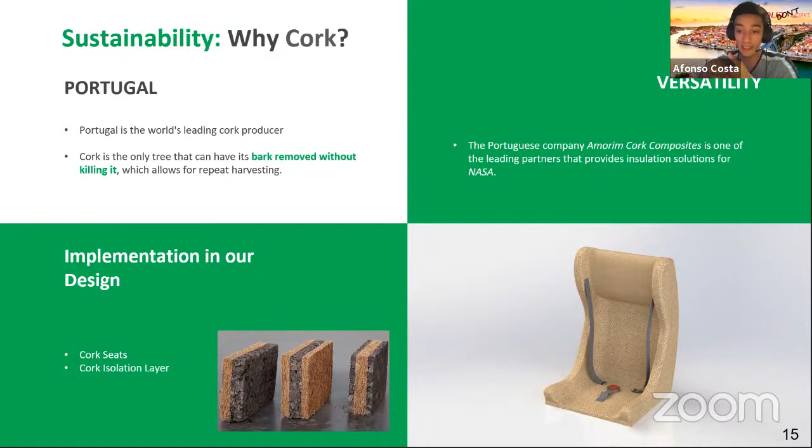Talking more about the practical implementation of our prototype, we devised some phases. First we start with the prototype, then we devise some future tests to achieve certification, have an initial investment of 1,000 units, and then achieve mass production worldwide. We chose our first place of action, Sierra Leone, a place that is normally really affected by natural disasters.

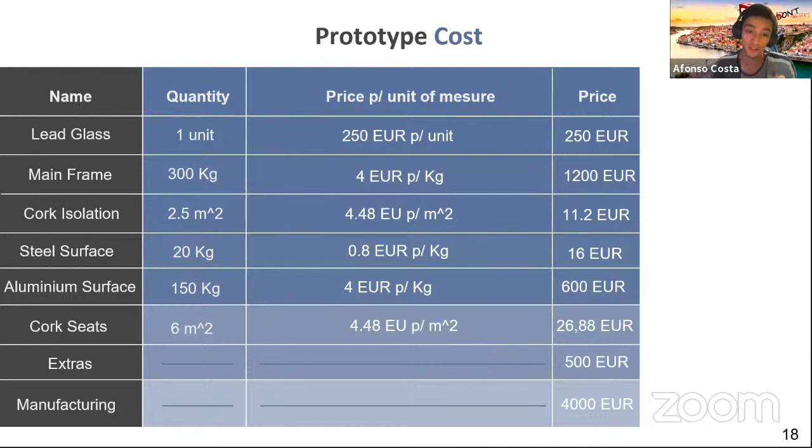We did a spreadsheet of the cost of our materials and manufacturing processes, trying to choose the most cost-effective options all the time. Our prototype cost us 7,000 euros.

With 1,000 units plus shipping and logistics, we would need an initial investment of 10 million, and we would try to get sponsorship mainly from UNICEF and UN NGOs.

To conclude, I think we can safely say that we achieved our objectives, and we strongly believe in our design choices. I think we as a team would feel safe in a natural disaster in our prototype. Thank you for your attention.

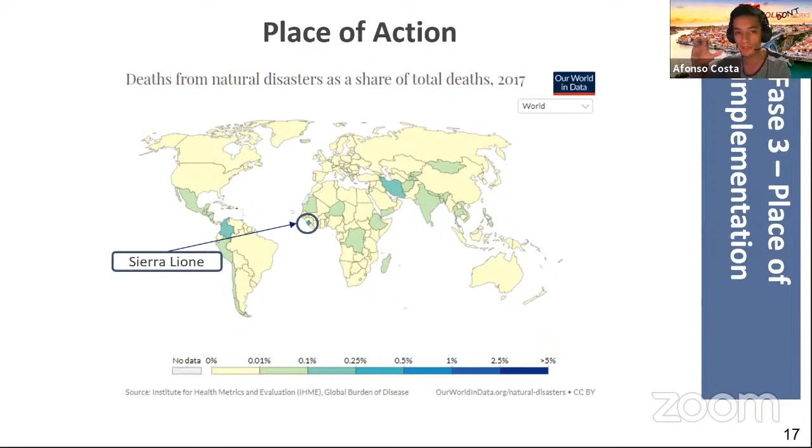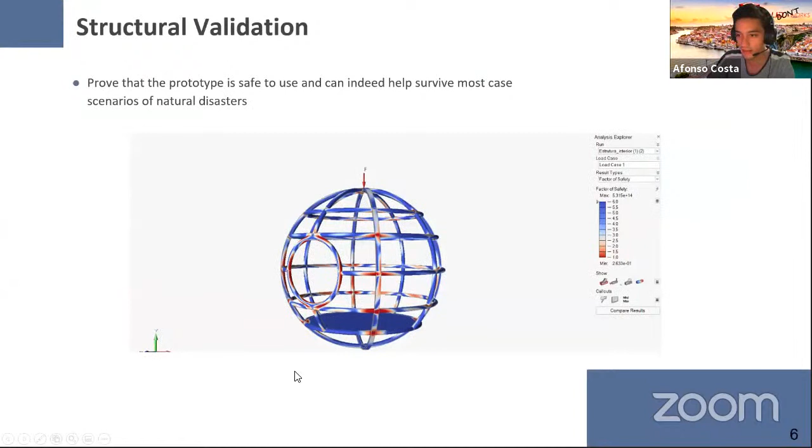It's kind of hard because of the type of technology and choices we try to achieve, but we actually try to think about that in our design methods. In our materials, we always try to find that trade-off between cost and performance. As for manufacturing, it's simple - the main frame can be welded, and the steel or aluminum tubes can be extruded. So we chose those ways.

We could also make changes to the structural aspect if a region has a typical disaster that's more prone to happen. We could remove some of the side tubular elements to decrease the weight or price, or remove the bearing mechanism to make it less complex and significantly reduce the price. So if a region doesn't have tsunamis, we could remove those options for a more cost-efficient solution. We could also do topologic optimization to cut down on material. That could be an option too.

Okay, thank you very much. Thank you, and last question from me. Thank you for this presentation, and for the beautiful designs, very visually appealing and very clear. Now I'd like to focus on the HEPA filter - it might be interesting if you go to that slide, because you mentioned it serves as a fume filter for the case of a fire, and as a radiation filter.

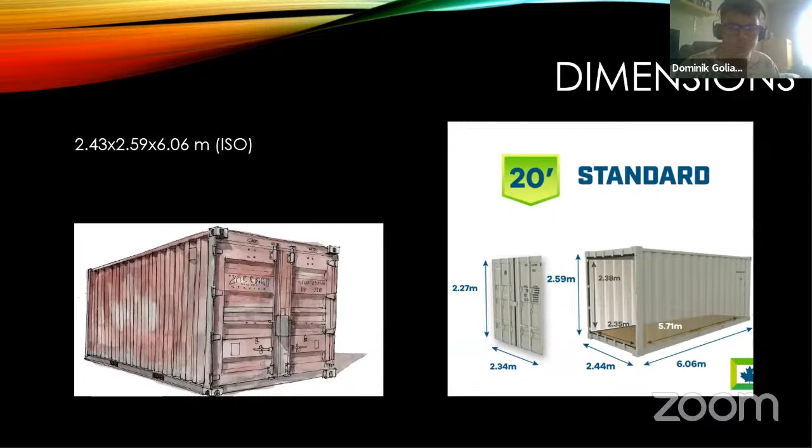Because we used these dimensions, it can be transported by ships, trains, and trucks. And we also want to help our planet, so Diogenes is made of recycled steel and plastic.

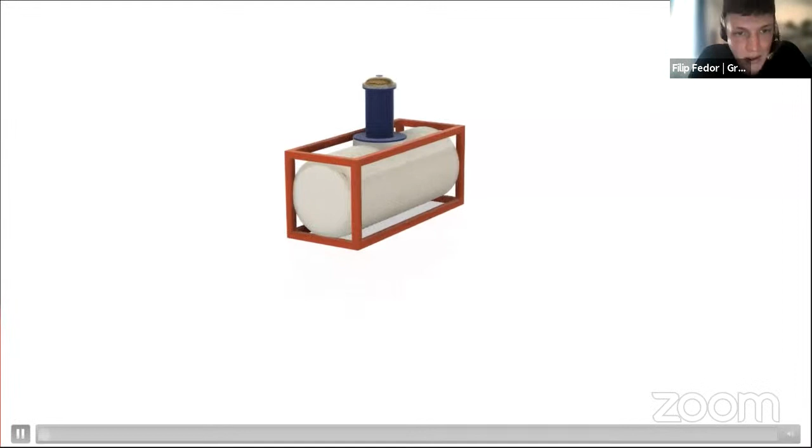So now you can see the Diogenes in its beauty. It's a tube which has good physical resistance. Here you can see the living quarters, which we will explain later. And the whole structure fits the dimensions of the ISO container, because the chimney, that's what we call it, is separated, can be separated, and can be folded inside. Then there is another section which we'll explain later.

So this is our design. The tube is composed from steel and then surrounded by a layer of concrete, and then comes the recycled plastic.

So our power supply was approximated to last for at least 3 days. We use car batteries, which are easy to use, easy to replace, easy to charge, and don't have too many problems with charge decaying over time, at least when compared to something like a lithium-ion battery. These batteries are used to power air recycling, the emergency beacons, and of course the lights and general electronics inside.

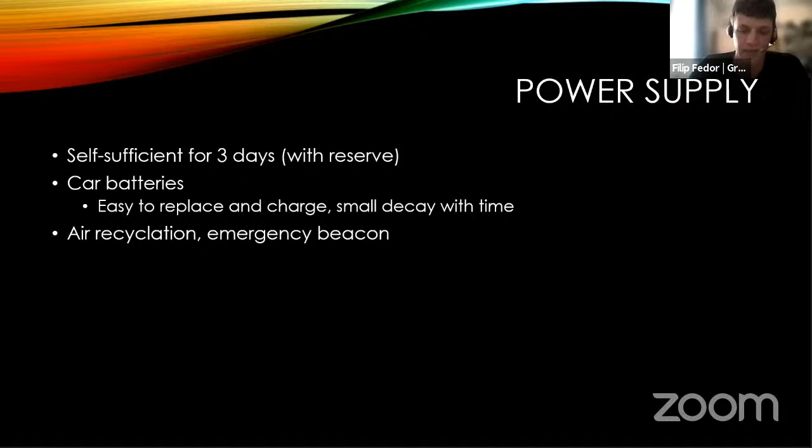These batteries are stored within the living quarters, within the beds, which also function as seats and as a table.

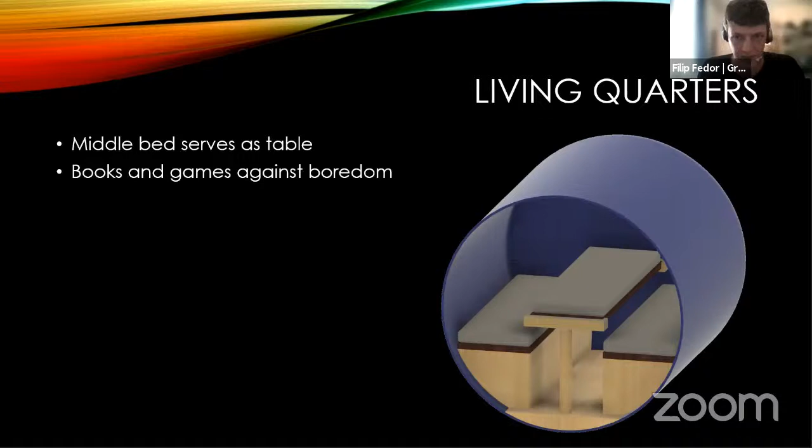The living quarters, as I already said, contain 3 beds, which also function as a table and seats, and would contain some general entertainment to last for 3 days. And the technical section contains a chemical toilet, a water reservoir for drinking water, and storage for medical supplies, food, and so on. Also, the floor would be a wastewater tank.

As we mentioned, our design is completely modular. The cylinder is solid, and then you can place inside everything you want. So, for example, if you want to last longer than 3 days, you add extra batteries, water, and also in case you want to go outside during the radiation problems, we can include CBRN suits. And for even longer period of time to survive, we can add a man-powered generator.

The structure is, we believe, rigid enough to survive any damage, and in case of fire, tsunami, and landslide it can be buried in the ground for extra protection. That's the chimney, or it can be mounted so that the exit is sideways.

According to the next slide, airstrike, the rigidity should also be enough. We didn't consider atomic nuclear strike because there you are probably not able to survive, but we considered radiation catastrophe like nuclear power explosions. And the whole container is sealed and airtight, so no radiation dust will get inside.

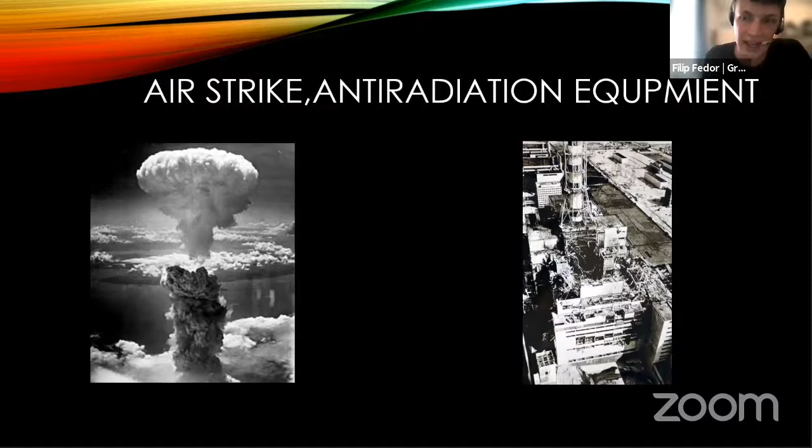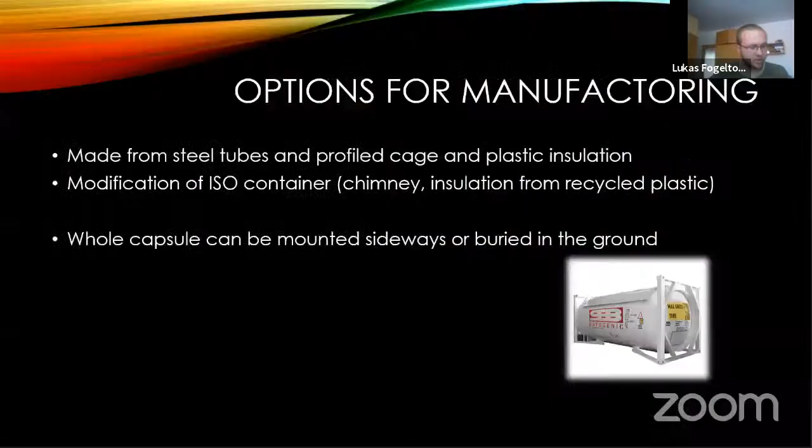Okay, manufacturing options. First option is made from scratch, from steel tube and profiles cage. The tube is coated around plastic insulations. Second option is to modify an ISO container used for transporting gases: cut out a hole for the entry chimney, coat with plastic insulations, and install the equipment inside. For protection it's necessary to bury it underground. We also rendered it to look like IKEA, because it should be easy enough to install and modify. Now we will answer questions.